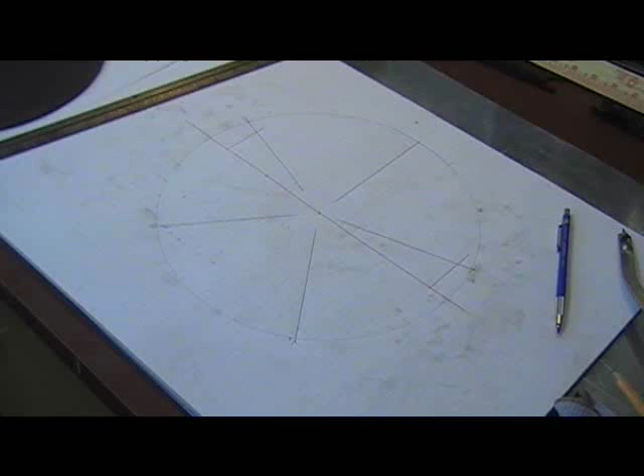Okay, folks, we're about to start the layout of the actual push paddles that are on the axle of the pendulum. Now we've done the wheel with the paddles on it, the power wheel for the verge and foliot escapement.

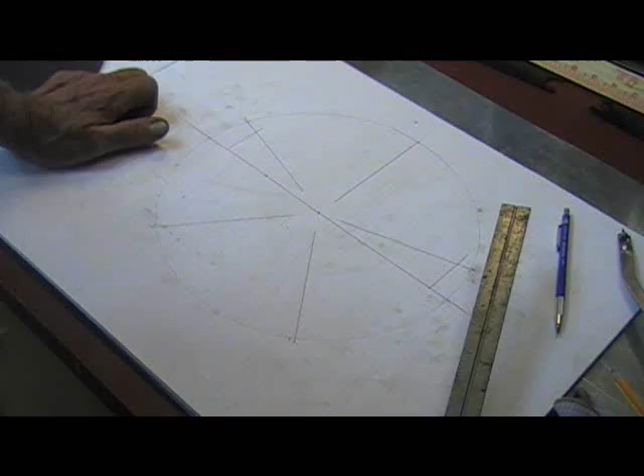What we've done is, so that you folks at home can see a little better, I've transposed it on paper. Excuse all the smudges, my hands are dirty. I've been working all day on this thing. But anyway, we've transposed it on paper, and the black circle is it. The black lines are your 5 divisions. That's where your paddle wheels will go.

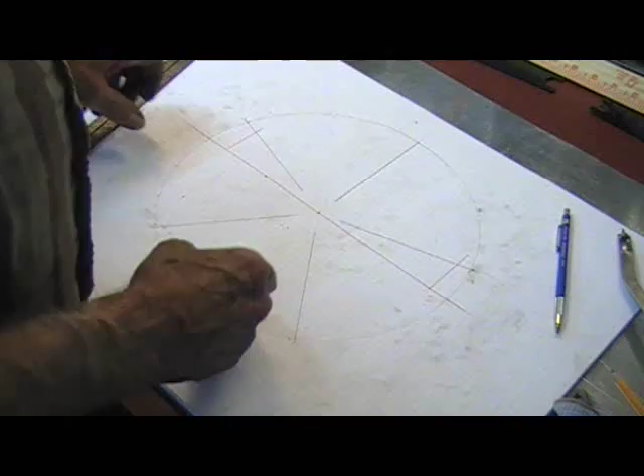Now, this, of course, turns this way, and these paddle wheels will come across and push on the push bar on the axle of the pendulum. Now what we have to do is determine how much throw we want. I picked roughly 1.5 inches. Now if you take 1.5 inches throw to the center, what you're going to have here is 3 inches of throw total. Okay, so anyway, it's going to come off here.

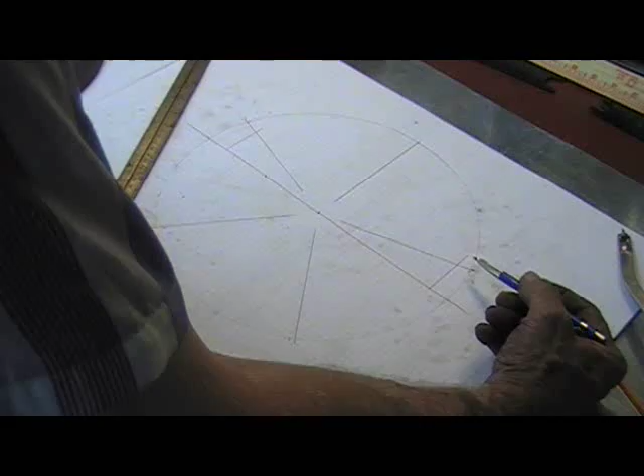But now if you're building one of these things at home, just about anything will work. I mean, you can have fun, but I'm not doing this for just a play project. I'm trying to build it as accurate as possible, because this is how I intend to actually measure the absolute necessary power to power the pendulum itself.

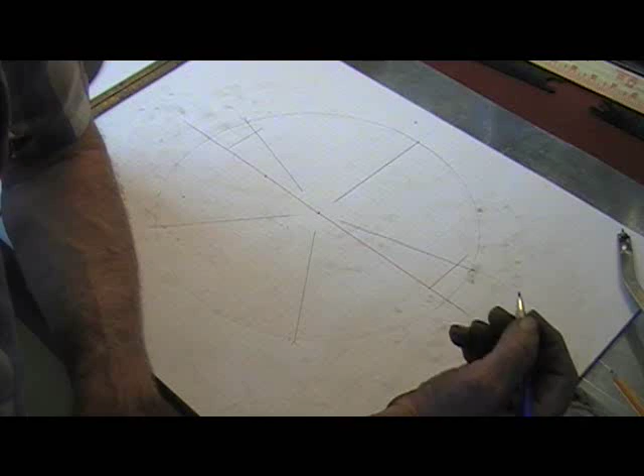I already know how to figure how much output the TSO, or two-stage oscillator, puts out. That's so simple it's pathetic. But measuring accurately how much power is taken to drive the pendulum is very difficult. A lot of people think you can put an electric motor on it and just measure the wattage, but that is bull. You can't do it. It will not measure it accurately.

Anybody who knows anything about electric motors and stopping and starting any kind of a motor, building speed and slowing down and stopping and building speed again, knows you cannot do this with an electric motor and measure the input. It's impossible.

Now what we've got here is, because I'm trying to make it as accurate as possible, I've got a 1.5 inch throw from this point. I hope you can see that. There is roughly 3/16 of an inch gap right here. That's where my drive is going to be, my paddle wheel, and it's going to be roughly 1/8 to 3/16 of an inch wide, like so. Same thing on the other side over here.

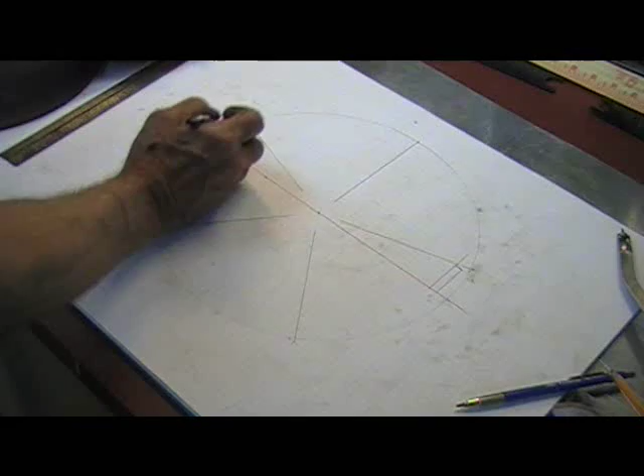Now it'll be at this point, and that gap right there, because our paddle wheel has a thickness of 1/8 of an inch. That allows it, as it moves a 1/16 here, it's going to move a 1/16 over here, which gives us, actually there's 3/16 here and 3/16 here, 3/8, and we're going to be using a 1/8 to 3/16 paddle wheel, which will be right here.

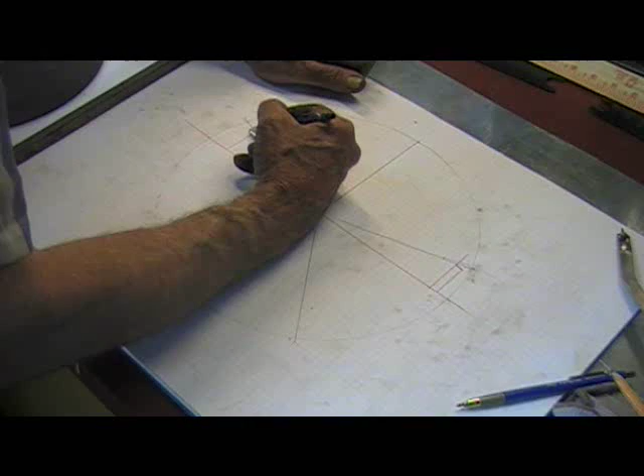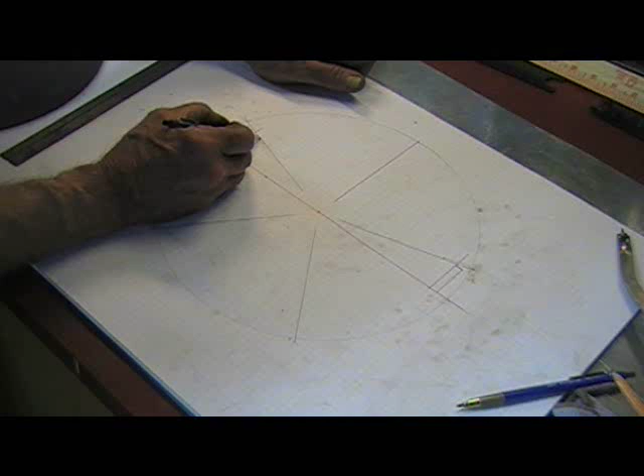Like so. Now your paddle wheel over here will be on this side coming in. Over here it'll be on the back side going out. So as you can see, as it comes off, this one starts on, going to a 1.5 inch throw, but the 1.5 inch throw actually hits right about here, and we come out a little further, so we actually have 1 and 9/16 to 5/8 inch on both sides, and what that does is give us the clearance for the thickness of the paddle wheel.

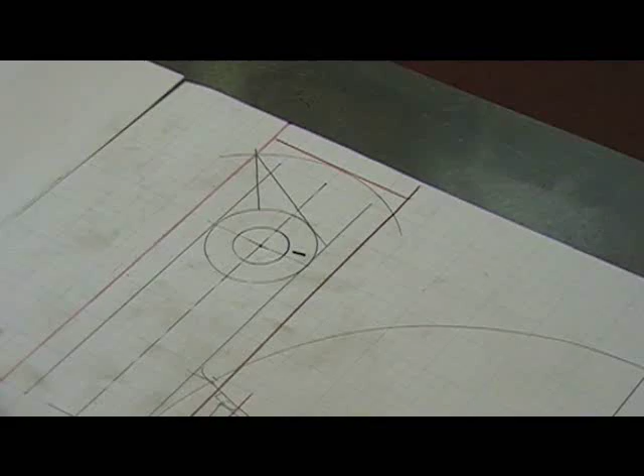I'm going to make this really short. Okay, on the actual layout of the axle paddle wheel, or power bar, whatever you want to call it, we wanted a 1.5 inch throw from outside to center, which would be a total of 3 inches.

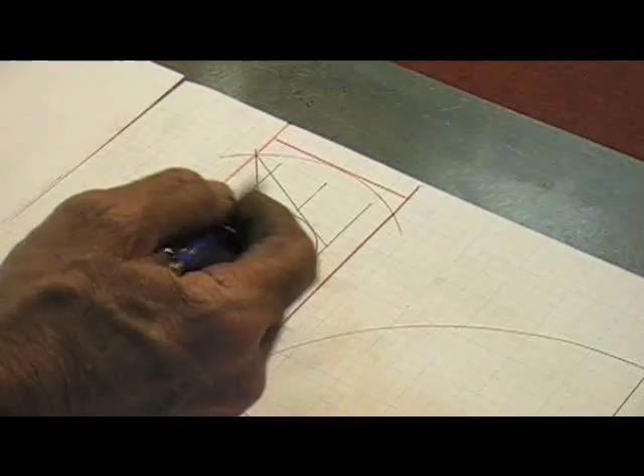Now what we've done here is we've laid out a 3-inch wide piece of metal just to make it simple and so you can see it better. I've done a 1-inch axle. Now with the 1-inch axle, that's what we're going to use on the larger TSO with a 600-pound pendulum outside. So I'm just doing this so that you'll see what's going on. You can actually see it a lot better.

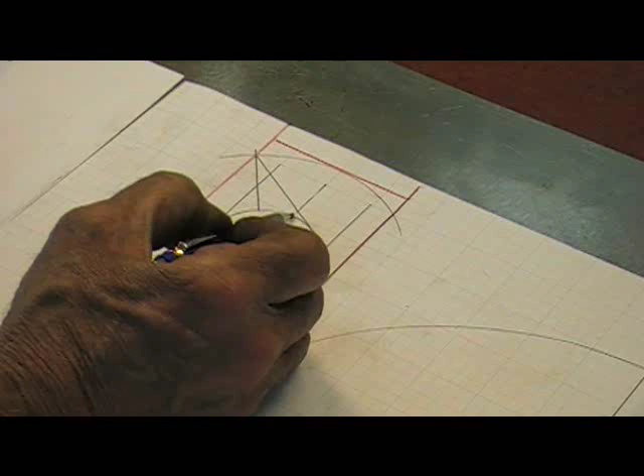We've done the axle, we've done the center, the hole for the axle. Now we need meat going around this axle to actually have the strength to hold the pendulum up and the force it's going to supply. So we come out with another 1/2 inch of meat, and we draw that line strictly so we'll know where we can and cannot cut.

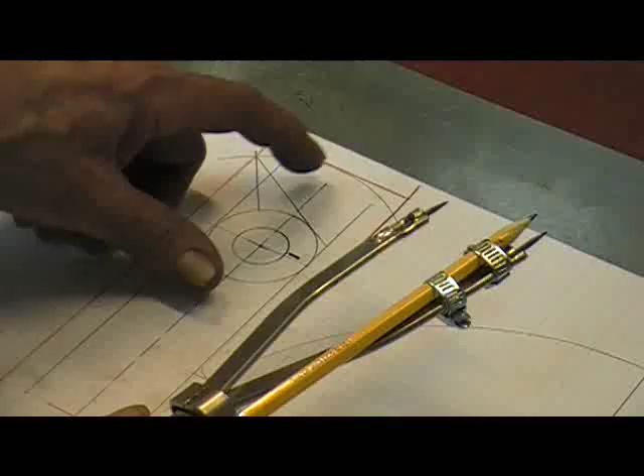Now at that point, we want a 1.5 inch throw, so anywhere outside this meat, from the meat out 1.5 inches, which would be to here. That's going to be our arc. So what we've done, we put this here, we measured out 1.5 inches out this way. We've done this and we made our arc. That cuts through our two sides of our metal.

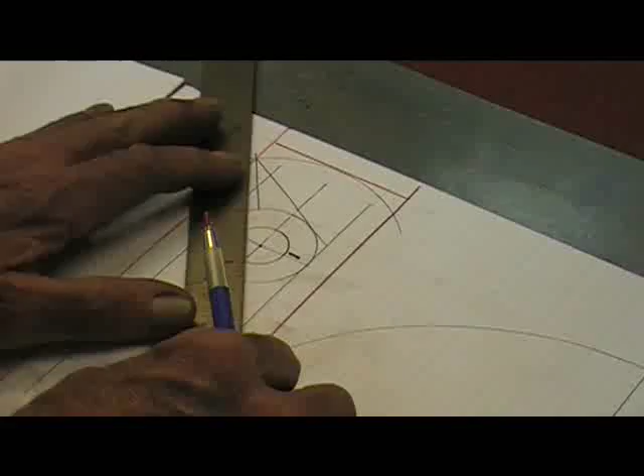Now, we take a straight edge and we go from the center of the axle, because we want this arc to follow, perfect, the center of the axle. We want it really smooth. And we just draw a line out to where it touches the edge of the metal, and that is your cut point right there. Then you go from that point back to the top of the meat, and you cut back on an angle.

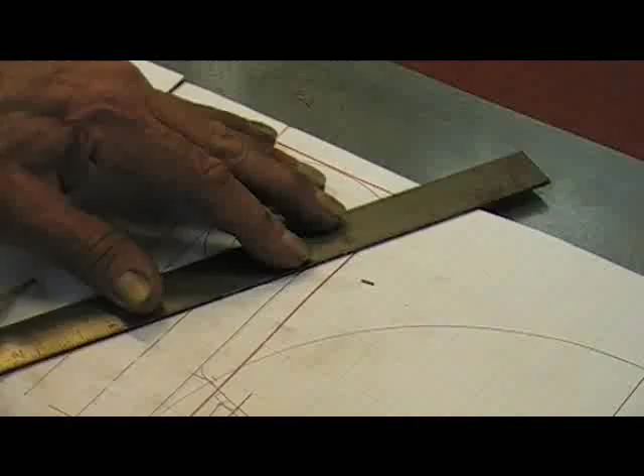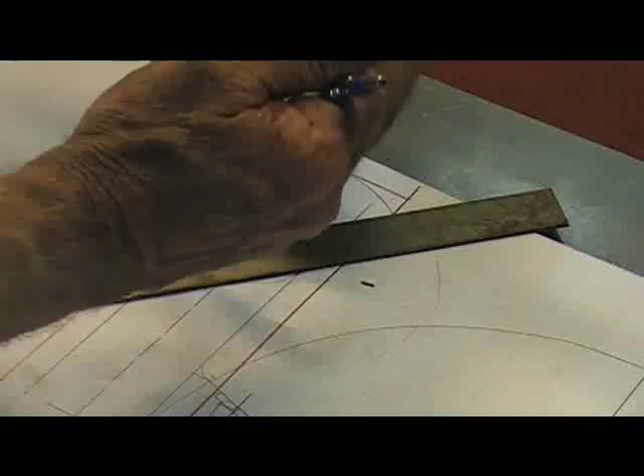Now the reason for that, by cutting it that way, that comes around like so, like this. So when it's over here, it's actually like this. And as the power paddle on the power wheel comes across, if it stops for any reason, it's not a flat surface and binds up, the pendulum swings back, it comes back and actually pushes it back, keeping it from binding up.

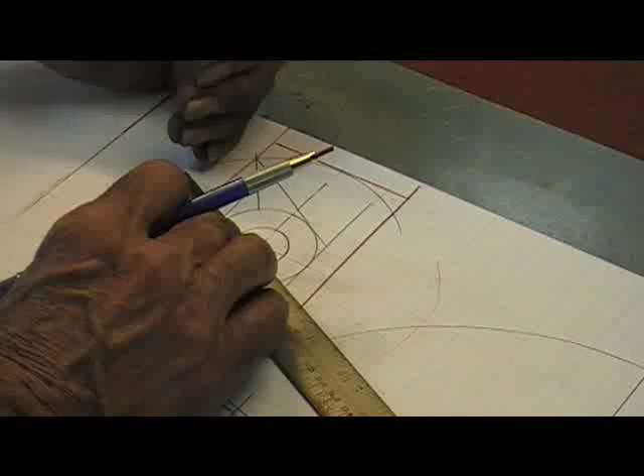Now, when it throws this way, there's an arc here, so as the paddle wheel comes in, it hits that arc. For example, if you throw it too much and it comes down, it hits that arc no matter how far it comes, until it comes all the way up like this, which is ridiculous. But anyway, it'll hit this side of this arc, and ride the arc without moving forward or backward. So then as the pendulum comes down, it catches, of course the bar will be right here, just passing straight across like this. And it comes up and catches it and comes around and goes off. I hope y'all can see that.

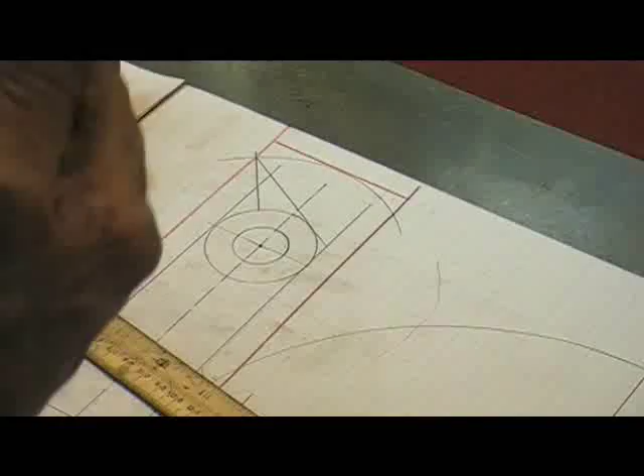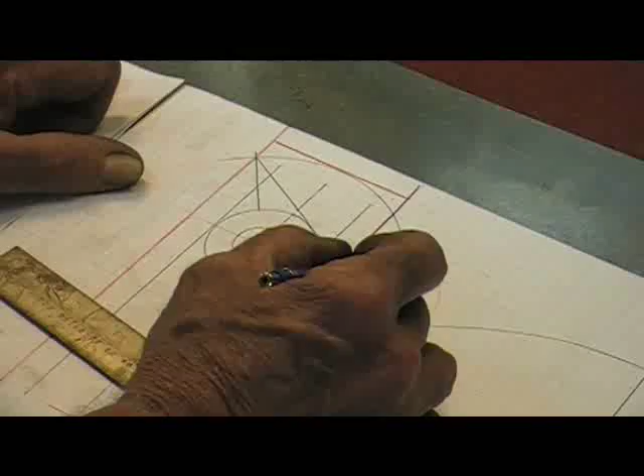Now the thing is, it's better if we were to make this like 4-inch metal and come 1.5 inches from the side, and then let the other 2.5 over here. That way our arc would come around over here more, and it would guarantee that it would not bind up even if you threw it way over. The whole point is to keep it from binding up.

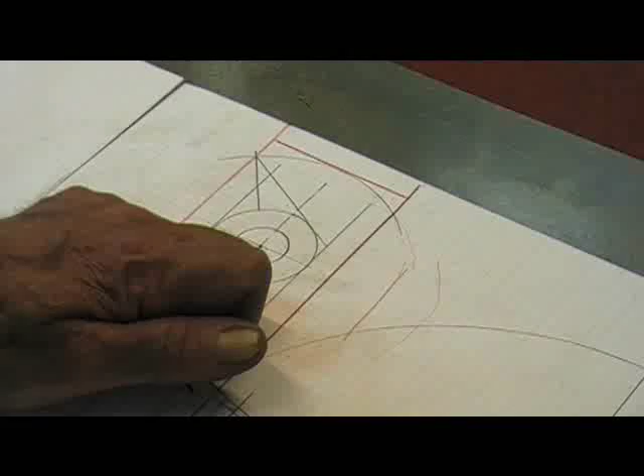Now, this edge right here, the flat surface right there, should be very highly polished, and I'm going to try something and see how well it works. I'm going to use Dan Rojas's idea, Dan Rojas and Denise Rojas from Green Power Science. I'm going to use his idea of cutting an arc or circle on a table saw.

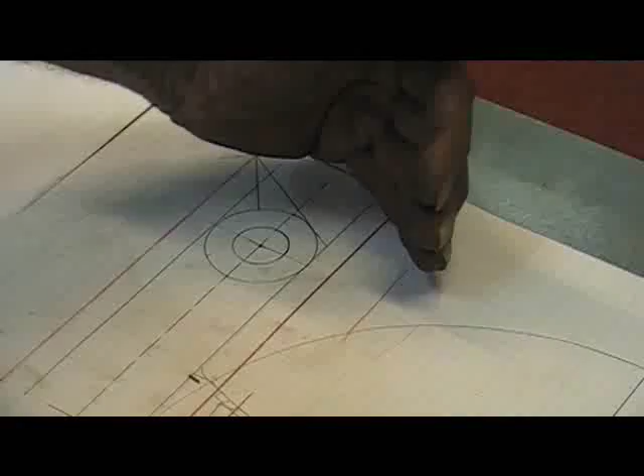However, I'm going to have to use a carborundum blade, and in cutting it, grinding it, and cutting it around, I'm hoping that it will polish and smooth the edge as it cuts. So, we'll see. I'm pretty sure it will. And I'm also going to try to cut this with a carborundum blade as well, so that I have a smooth, polished edge right here. All right, I hope everybody understands that.